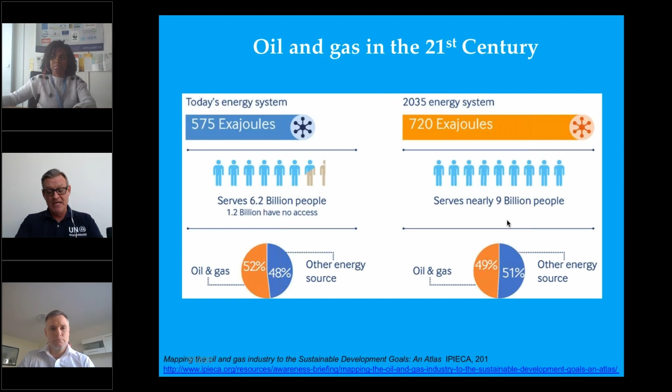Throughout the life expectancy of the oil and gas sector, chemicals are used, let's say, from cradle to grave. We're focusing on the exploration and production side of things, and within this particular module, chemicals are used throughout, whether it's at the time of exploration drilling, logging and testing, well completion, field management, workover and stimulation. Bottom line is, whatever link in the chain of the oil and gas sector, hand in glove with that is the use of a very large and complex number of chemicals.

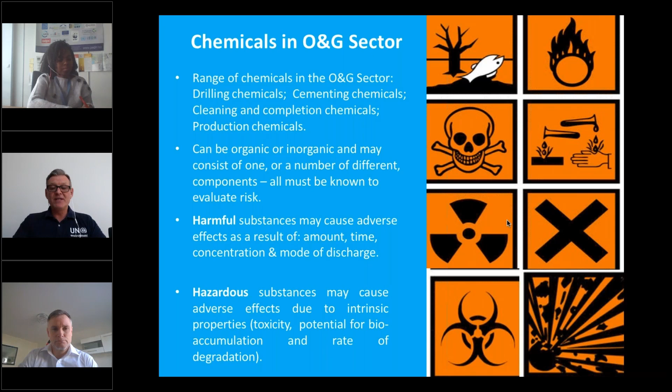Moving on, one of the biggest aspects in oil and gas as it pertains to both chemicals and waste management is the drilling fluids which are used. Drilling fluids are a major component of the sector and present major environmental and public health concerns.

When we talk about drilling fluids, there are primarily two categories: the more simple water-based drilling fluids, acronym WBDF, and the more complicated, potentially more hazardous oil-based drilling fluids, OBDF. As the name suggests, water-based, the base material is water; oil-based, the base material is oil. You could think of the differences similar to a water-based or an oil-based paint - very much the same phenomenon applies to these drilling fluids.

In more recent times, there's been a third category of drilling fluid developed and put into the marketplace: synthetic-based drilling fluids, where the oil has been largely replaced by more modern synthetic chemicals.

Water-based drilling fluids are by far the simplest, and by far the most environmentally benign, and also the cheapest. So given the choice, oil engineers would, as a first port of call, use water-based drilling fluids simply because they're cheaper. However, they have limitations - they're not good for use in deep, complex drills, drill sites which are horizontal, or where we have particularly complicated geology. That's where oil-based drilling fluids, or more latterly synthetic drilling fluids, come into play.

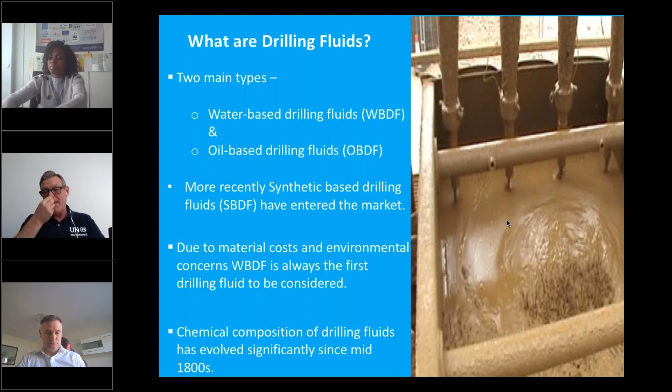Drilling fluids have been around as long as the oil and gas sector. We go back to the mid-1800s, and the chemistry of drilling fluids has evolved quite significantly. At the start of the enterprise, drilling fluids were largely water and clay, but more latterly there's been a greater infusion of chemicals and hydrocarbons, and more recently synthetic chemicals. So it's an evolution, and that process of development continues today.

Each of those chemicals comes with their own environmental and public health risks, and we as environmental practitioners need to be familiar with the components and familiar with how best to manage them. Bottom line is, drilling chemicals - drilling fluids are a cocktail of different chemicals.

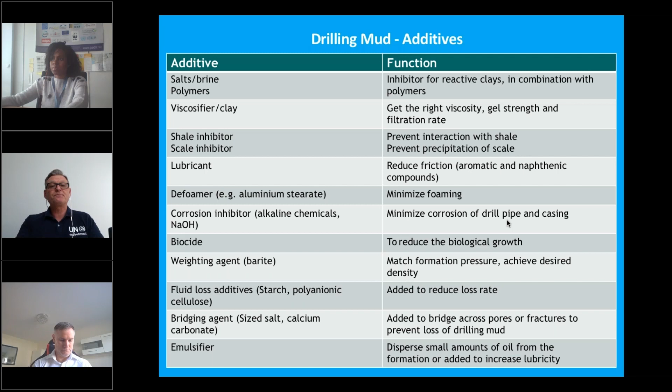As I mentioned before, water-based drilling fluids are comparatively benign. If used offshore, they would typically have little effect if discharged into the marine environment, depending on the depth and location in relation to the shoreline. But it's not uncommon for water-based drilling fluids to be discharged into the marine environment.

That said, we don't encourage the discharge of water-based drilling fluids in a terrestrial, shore-based environment, because they can have elevated pH and elevated salinity, which are not necessarily an issue within the marine environment, but within the terrestrial environment they probably are going to need to be contained and treated before disposal.

Dealing with the more complicated, deeper wells, more complex geologies where we're using oil-based muds, these muds are a cocktail of chemicals, many of which are toxic or hazardous. They are not allowed to be discharged within the marine environment, nor the terrestrial environment. They need to be contained, managed, treated, and finally disposed of. Due to economics, all drilling fluids will be reused and recycled to the extent possible, but there comes a point after which they will have to be disposed of, and that's where some of our greatest challenges are encountered.

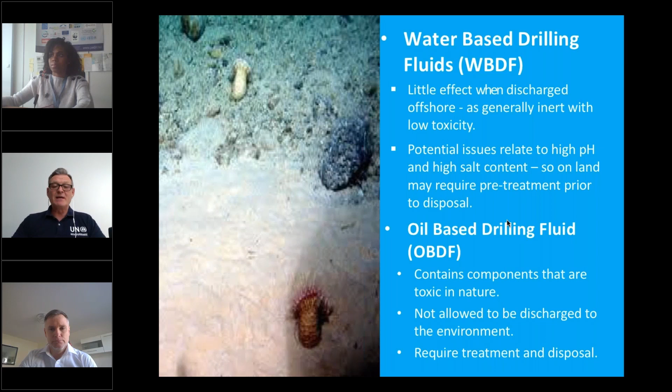We talked earlier about biocides. These are an example of a component which may contain red chemicals, a red flag. We need to be aware, we need to be concerned, and we need to monitor and manage it very carefully.

So the chemicals within the drilling sector will typically be discharged within the host environment. Many of them will be contained within the produced water. What is produced water? When we strike an oil reservoir, it would often be in conjunction with a lot of water. That water also gets liberated through the drilling process, and that's often referred to as produced water. The produced water may contain a lot of chemicals, may contain a lot of hydrocarbons. They need to be managed.

In more sophisticated operations, the produced water can and should be reintroduced back into the underlying geology. Often isn't done because it's a complicated process. Therein we end up with a disposal, a chemical problem. Again, produced water is a large chemical holding body, a large waste management consideration that we will have to encounter.

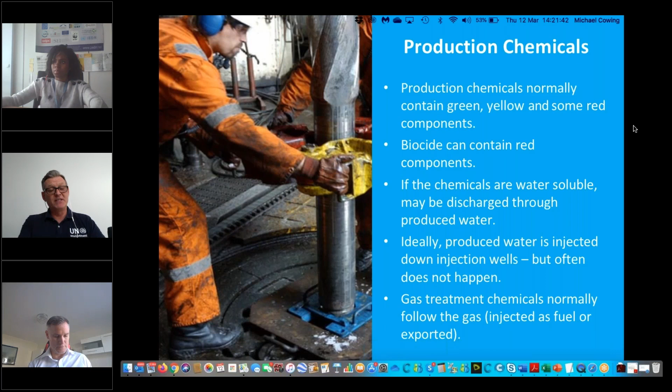Moving on, talking about the classification of chemicals, the classification of hazardous substances, we again have an articulation of this color coding: green non-hazardous, yellow or orange hazardous, red very hazardous. This color coding is done in conjunction with international conventions, international agreements, such as the United Nations Global Harmonization System, the acronym being GHS.

You may have heard of it, don't worry if you haven't, in time you'll become familiar with it. Basically, as the name suggests, it's trying to harmonize internationally the language we use, the names we use, the packaging we use when handling chemicals, to try and reduce miscommunication. Miscommunication will often lead to accidents and incidents. So we're trying to simplify and harmonize the language we use around managing, transporting and using chemicals.

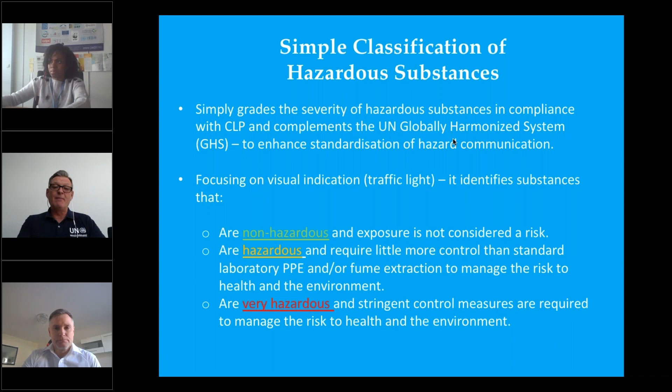I move on now to the Material Safety Data Sheet, the acronym for which is MSDS. Every chemical used, transported and ultimately disposed of must be accompanied by the MSDS. I would say as an environmental practitioner, this is possibly the most important tool in your toolbox for managing chemicals. The MSDS is in compliance with international conventions. It's not optional, it's a must. The manufacturer must send chemicals with the MSDS.

The user, in this case the oil companies, the subcontractors, must have the MSDS to hand. It must be available, it must be displayed, so that individuals working with the chemicals are familiar with the risks they're being exposed to, familiar with things such as health and safety requirements, and familiar with what personal protective equipment needs to be used. The MSDS will also, in detail, tell us how ultimately these chemicals need to be disposed of. So as I mentioned, the material safety data sheet is a key thing in the management and regulation of chemicals broadly, but also specifically within the oil and gas sector.

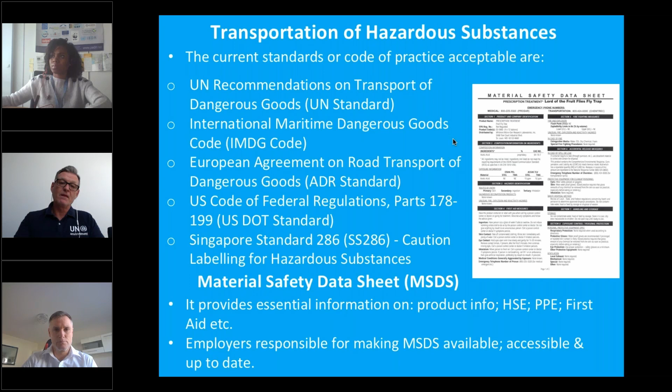To manage the risks, we need to understand the composition of all these chemicals. We can't know one component and not the other. We have to understand in entirety what the components are and what the risks are. If uncontrolled, chemicals can pose serious risk to both public health and the environment.

To help you manage chemicals, there are multiple interlocking, interrelated national and international legislative tools, be them national laws, international treaties, international agreements. There's a host of them in place. We need to be familiar with them and how to apply them. Most importantly is the MSDS, the Materials Safety Data Sheet, which must be drawn up in compliance with all these international laws and treaties. The MSDS is your best friend, your best tool for managing chemicals in the oil and gas sector.

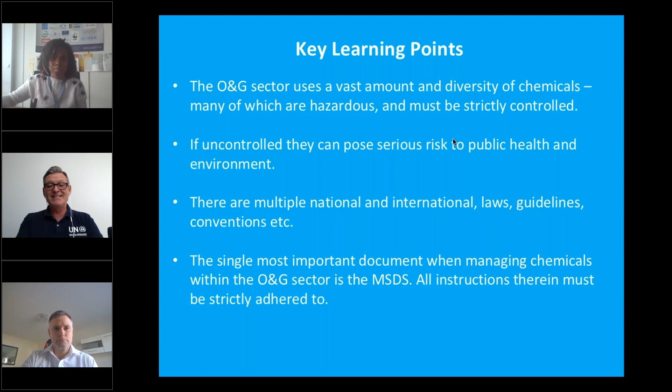Thank you for that. Again, very rushed, very simplistically, but hopefully this gives you an overview of some key points as they relate to the oil and gas sector.

The second part of the presentation relates specifically to waste management within the sector, and there's a lot of overlap between use and management of chemicals and management of waste, because many of the chemicals used ultimately end up as a waste product.

What will we talk about in this section? We'll talk about what is waste, why waste is a concern to us. We'll look at some definitions of waste, which is very important in a legal context - when is something a waste, when is it not. We'll look at some international frameworks, in particular the European Waste Framework Directive, a very important piece of legislation in a European context. What are some of the specific wastes in the oil and gas sector? Waste management planning, which is a key component, and we'll remind ourselves at the end of some key learning points.

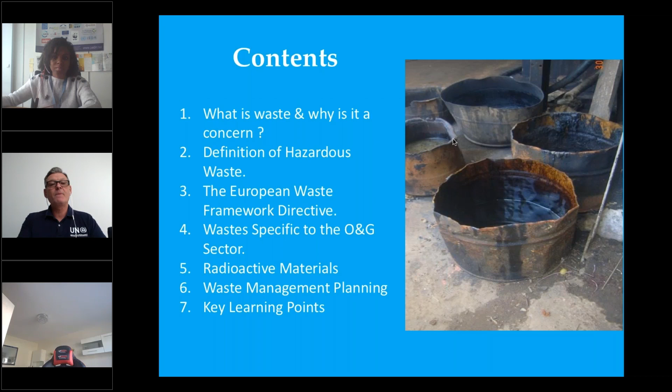So, what is a waste? In the legal sense, a material becomes a waste when it is a substance or object which the holder discards, or intends to discard, or is required to discard legally. So it's gone beyond the point of its utility value - it's to be or has been discarded.

When we talk about hazardous waste, that falls under the same definition, but there's a sub-definition: hazardous wastes are those which pose substantial or serious threat to public health or the environment, hence the name hazardous. They can be hazardous because of their characteristics, which could be ignitability, reactivity, toxicity, or corrosivity - one or more of these makes the waste product hazardous. Again, they can be in various forms - gaseous, liquid, or solid.

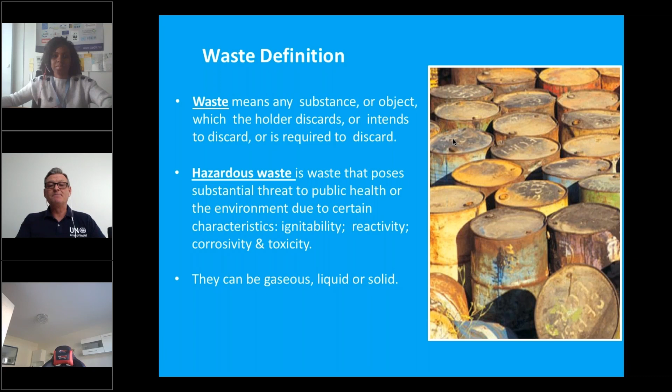Sorry, Mike, to cut you short - we have like 10 minutes for you to do your presentation. Okay, jolly good, I've just been informed I have 10 minutes left, which is perfectly fine. I think we're on course.

The drilling fluids, we've talked about a little bit - it could be oil-based, chemical-based, or synthetic, but it's the drilling fluid being pumped down the well, which will be reused to the extent possible, but ultimately becomes a major waste management problem for us. We then have produced water, which we talked about previously.

Oil and gas being liberated, but often in association with substantial volumes of water. Produced water by volume alone is arguably our biggest problem. It can be re-injected, often isn't, which leads to very significant problems. We then have secondary waste problems such as drainage water, domestic waste, sewage, cooling water, solid waste, and accidental spills—all of this material becomes a waste which needs to be managed.

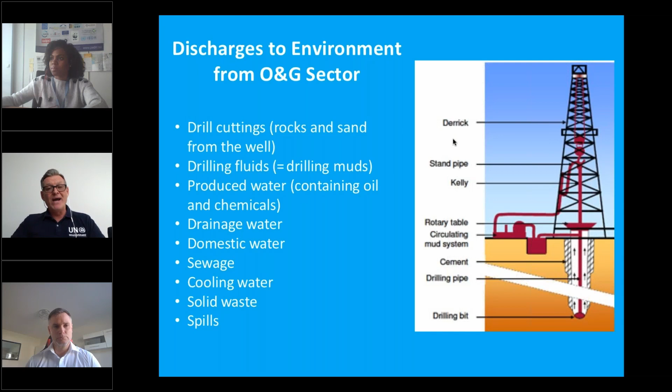In terms of the treatment of hazardous waste, it needs to be managed cradle to grave—every link of its life cycle has to be managed with no inadvertent discharge to the environment. We have to recognize that the oil and gas sector is a very substantial waste generator globally.

In a lot of countries, international oil companies are working in developing countries. If we talk about Africa, Asia, to an extent the Caribbean, a lot of these developing countries lack substantial or sufficient waste management infrastructure. They may not have engineered landfill sites, incinerators, or thermal desorption units. So if oil companies are producing waste in an environment where the host country doesn't have the waste facilities, those facilities have to be developed and engineered, long-term or imported on a mobile basis. Incinerators and thermal desorption units can be imported, or the waste itself has to be managed, packaged, and exported to a disposal facility.

Irrespective of whether the oil company is American or European, operating say in Africa, the oil company should not lower its standards to those that pertain in that particular African country. The important thing is they should adhere to the same standards they use in Europe and North America. In my experience, very often they will try not to, but as regulators and environmental scientists, we have to ensure oil companies operate to the highest standard.

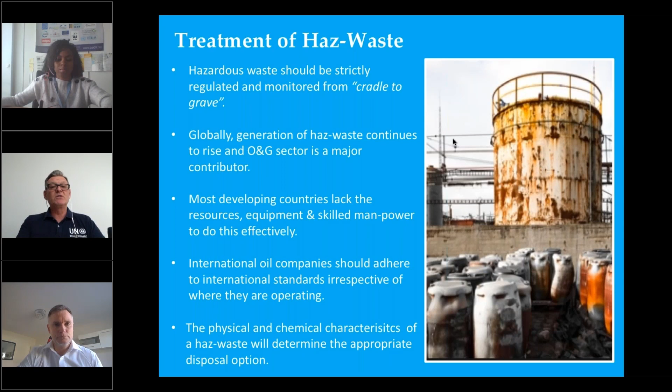The physical and chemical characteristics of the hazardous waste will determine which disposal option we use. In Europe, a very important piece of legislation is the European Waste Framework Directive, which sets in legislation many important components and considerations.

It enshrines the polluter pays principle, which means if you generate the waste, if you are the polluter, you have to pay. Extended producer responsibility means if you're the waste generator and you give it to a third party transporter, for example, and he dumps the waste illegally, you as the generator still retain responsibility. It's not out of sight, out of mind.

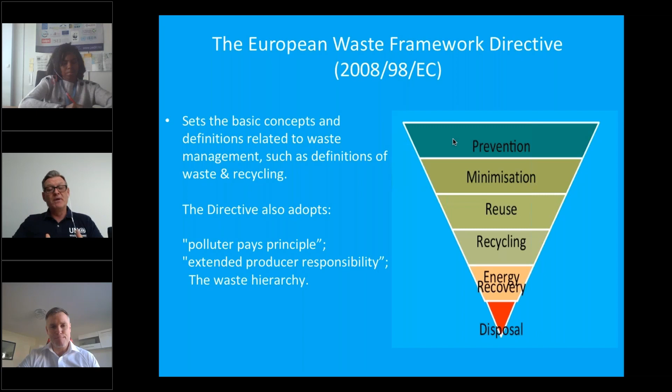It also introduces the waste hierarchy, which I think we'll all be familiar with. This enshrines the fact that at the top of the hierarchy, the most desirable is that we prevent waste, minimize waste, reuse waste, recycle waste, and only at the bottom end, only the smallest remaining fragment of waste ultimately needs to be disposed of.

In terms of the management of hazardous waste, when you have hazardous waste, you have to act appropriately. The hazardous waste cannot be mixed with inert waste, it cannot be diluted. It has to be properly contained and labeled, must go to a licensed hazardous waste disposal facility, and the environmental regulator, whichever country, has to be notified of that movement of hazardous waste.

Some rogue operators might want to dilute the hazardous waste, or mix it to get it to a chemical characteristic where it's no longer classed as hazardous. Such approaches are prohibited in law and should be monitored and regulated by ourselves, not condoned, and corrective action needs to be taken.

The picture on this slide is taken in an African country—cradle to grave, I followed the process. The hazardous waste, which was meant to be going to an engineered landfill, ended up, as shown here, dumped on some agricultural land. Very sad, very common. That's where strict regulation and enforcement is essential.

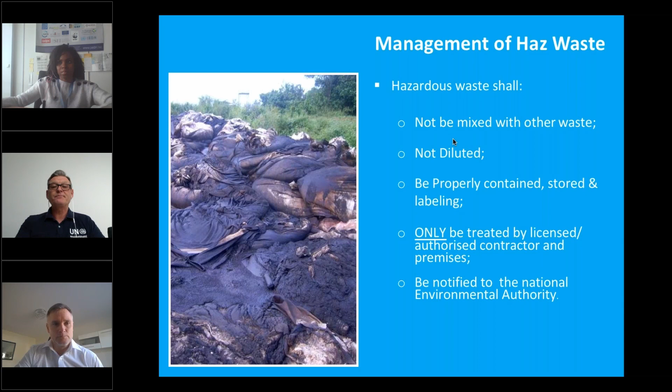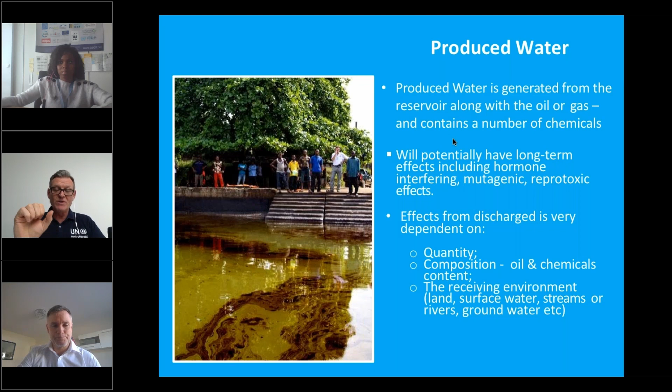We've talked about the impacts of water-based and oil-based drilling fluids, I don't need to labor that again. Produced water, if discharged inappropriately, as shown in this picture, is going to be liberating chemicals and hydrocarbons. Produced water, we have to get on top of it—I'll explain how we can do that. And we have very many emissions to air, one of the biggest culprits of that being flaring and venting.

We're saying in this day and age, flaring and venting needs to be a thing of the past. It needs not to be encouraged other than under perhaps emergency situations. How do we manage all of these different solid, liquid, and gaseous wastes?

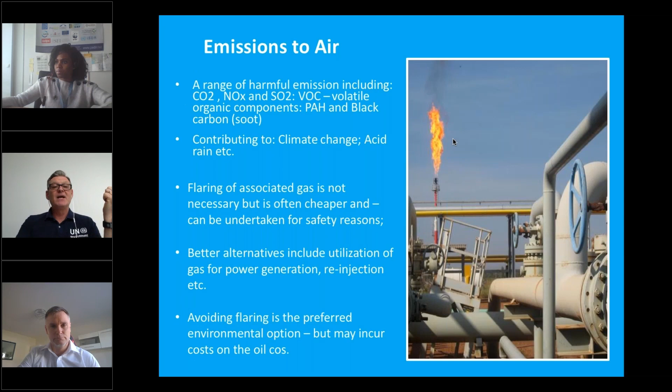This should be encompassed in the waste management plan. When applying for a license, when the EIA is being done, the oil operator has to produce a waste management plan. With chemicals, we've got the material safety data sheet. With waste, we've got the waste management plan. It is the Bible, it is crucial. The operator must anticipate how much waste is going to be produced, of what characteristic, where and when.

Some of the graphs to the right would show you that I've extracted from a waste management plan. They're anticipating what they're going to generate, when they're going to generate it, and in what volumes.

So the plan must identify the waste. The plan must also identify how it is going to be disposed of. If there are existing facilities to be used, all well and good. If there's not, what are they going to do? Are they going to build a landfill site, for example? Are they going to import thermal desorption? Are they going to import incineration? Are they going to stockpile, package, export overseas?

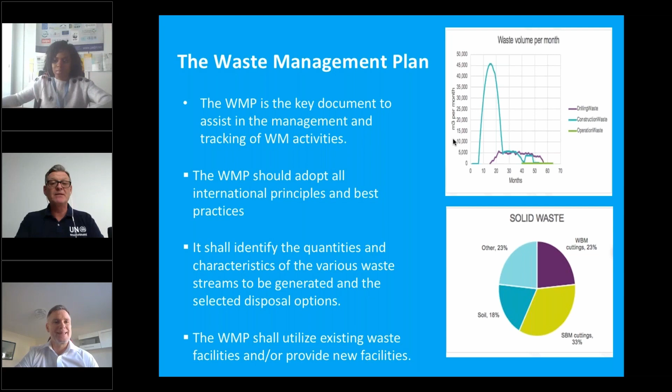When you're evaluating the waste management performance of a company, the waste management plan is your Bible. That's your go-to document. There are many options for waste management. I've mentioned some of them in passing. Ian's going to get into detail on them.

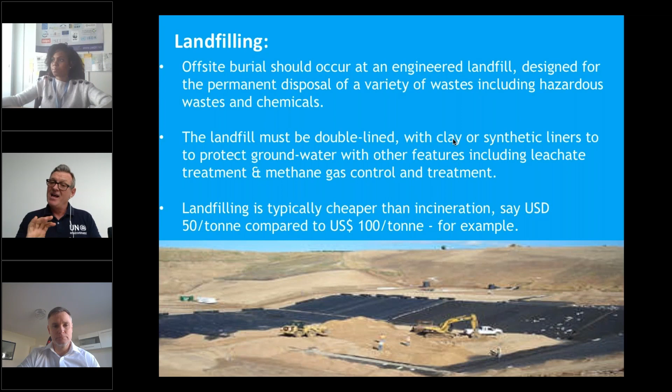We have landfilling, which is an engineered site with low permeability membranes. It's really a containment solution, relatively middle order cost, perhaps $50 per ton.

Thermal technologies are more expensive, perhaps double the cost, but there is a role for thermal technology. Some waste products, some hydrocarbon products won't lend themselves to bioremediation, won't lend themselves to landfilling. They'll need to be disposed of thermally, either by incineration or thermal desorption. Ian will talk more about these in the coming presentation.

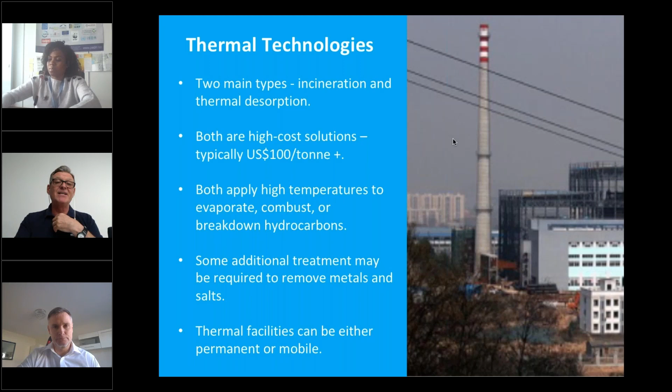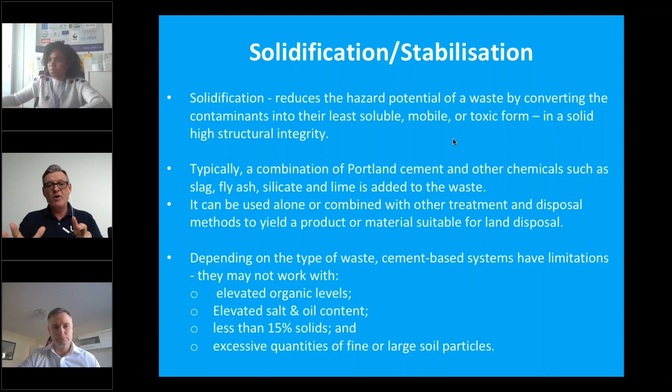There's solidification, where you try and stabilize the product, typically using cement, fly ash silicate. It does have an application, but doesn't work in all situations. If you have less than 15% solids, if you have very elevated organic levels, it's probably not going to be the technology for use. An example here of contaminants, hydrocarbons, being cemented in place to reduce their migration, to reduce their leaching.

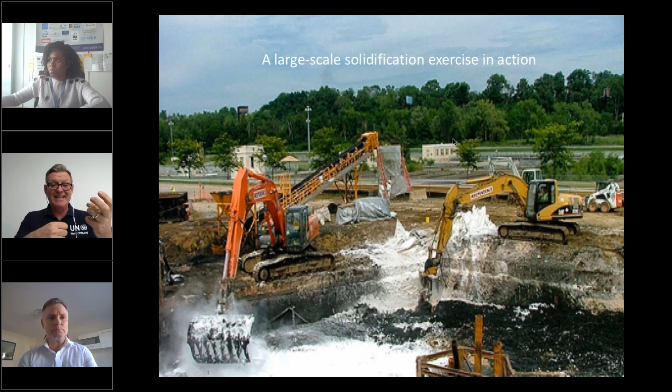So basically, there's a range of waste products, there's a range of solutions, all of which need to be evaluated, identified, and selected in the waste management plan.

Very quickly then, just to summarize with my final slide, some of the key learning points. We have to recognize the oil and gas sector is a major waste generator. Waste management is hand in glove with oil production, gas production. Much of this waste is hazardous and will need strict control, regulation, and enforcement. Some of the biggest waste products you're going to deal with will be the cuttings, the waste mud, and the produced water. Very large in volume.

It needs strategic planning in advance, not at the time of when it's being produced. Oil companies must comply with best practice, best international practice. They cannot lower their standards simply because they're working in a developing country. I think my final point is just to re-stress the fact the waste management plan is the Bible, it is the key, and it will enable you to keep the oil companies on track, honest, and performing in compliance with best practice.

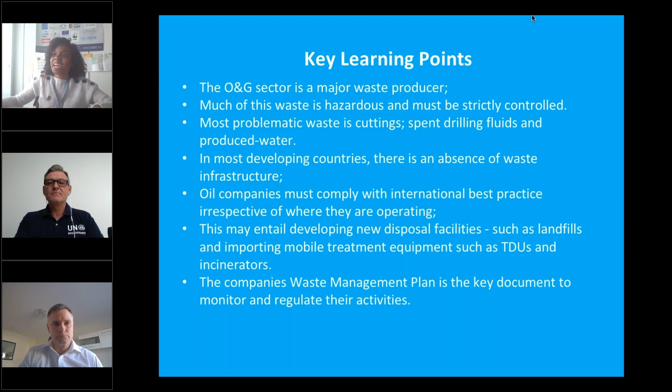He's going to be focusing on one of the projects he's done in Iraq. Thank you, Chi, and welcome everybody. I'd like to present a couple of case studies on remediation and waste management in the oil fields from the experience that RSK have had in Iraq over the last 7 years.

We've been working in the Basra Governorate for about 6 years now in a number of the oil fields, including Rumaila, Zubair, and Majnoon, as well as West Qurna. The two case studies that I'd like to cover today relate to the work that we've done in Rumaila. You can see that on the maps on this slide, and also further east in Zubair oil field.

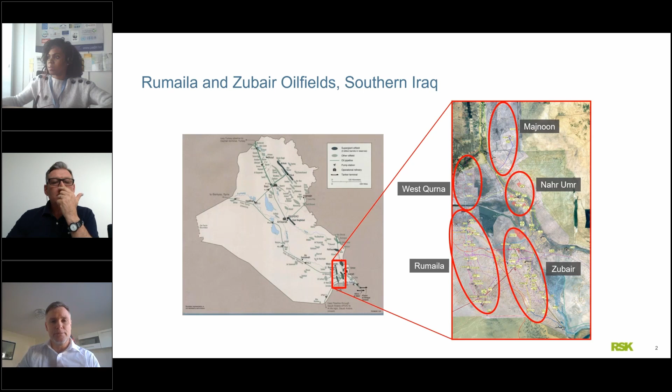Mike's touched upon this in his overview presentation. What I'd like to talk about today relates to particular primary sources of contamination that we find in the oil fields, including gas vent pits, degassing stations, leaking oil pipelines, and, as Mike mentioned, produced water pits, which come in various shapes and sizes but, certainly in southern Iraq, can be very extensive, covering several kilometers laterally, with a mixture of oil and water ponding in an uncontrolled fashion across the oil fields.

It's very important to assess the environmental setting of a particular contaminated feature or leak site in order to understand what the potential environmental risks might be, identifying the key receptors to the contamination in order to assess what the potential linkages might be between the sources and the receptors.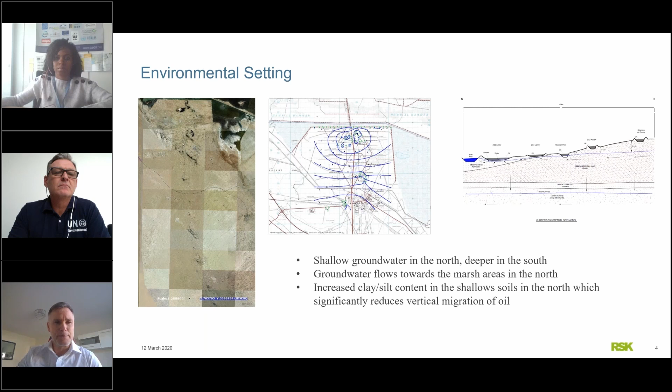On this slide you can see the point I'm trying to highlight, which is the different penetration of the oil in the north and south of Rumaila field, due to the difference in the clay and silt content of the soil.

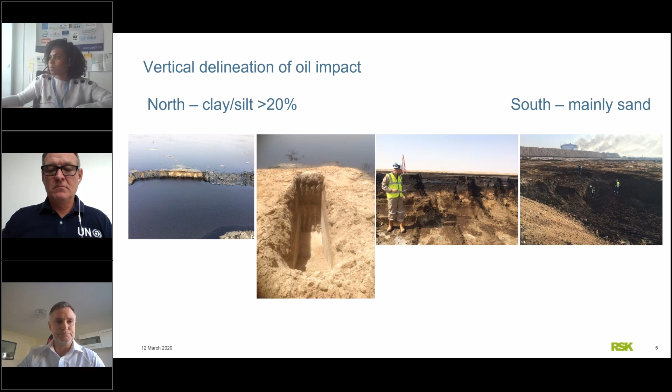It's also very important to have an understanding of the composition of oily wastes in an oil field environment, and to recognize the difference between a fresh oil spill and one that has undergone a degree of weathering.

By comparison, when we look at an oily sludge that is heavily weathered, perhaps having weathered in the desert for a number of years through natural processes of degradation and volatilization, we see a significant reduction in the relative proportion of C5 to C35 hydrocarbons and a relative increase in the heavier, more complex hydrocarbons that don't typically degrade well naturally. The percentage of C5 to C35 can be as low as 15% in a weathered sludge.

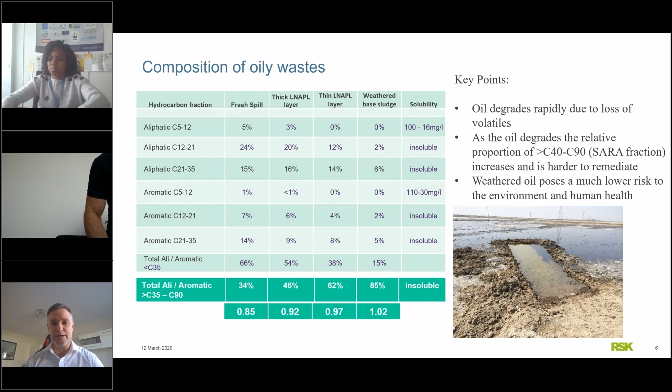When we're looking at the design of a remedial system and an assessment of the risk, it's very important to try and ensure that any remedial targets that we develop and negotiate with the regulators are risk-based and take into account the associated source pathway and receptor linkages that we've identified in our initial assessment.

As I mentioned before, the receptors very often in an oil field environment are groundwater and surface water receptors, but we also need to consider oil field workers and any neighbouring communities that may potentially be at risk from the contamination sources.

In determining risk-based remedial targets, we also need to ideally develop individual targets for the separate TPH fractions rather than generating a total TPH remedial target, because the risks associated with the different TPH fractions vary significantly.

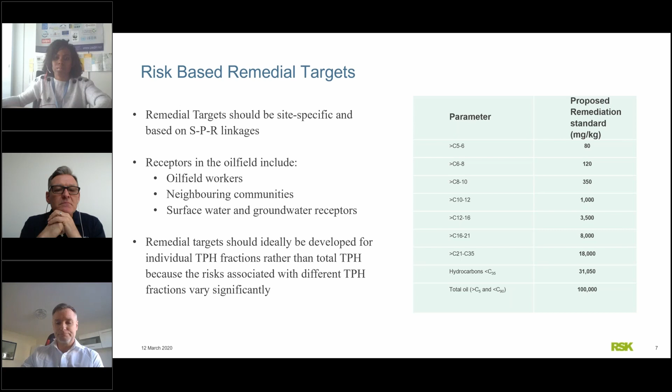So how do we remediate these produced water pits, these vast expanses of oil and water lagoons in the desert? It's very much an engineering approach, using earthworks and heavy plant to isolate the lagoons into separate areas by creating earth bunds in order to create more manageable areas where we can then pump out any oil and water if possible, or bail out the water into a sump or a containment pit.

That's the first phase, which then allows access for us to undertake any UXO clearance that might be needed. UXO clearance isn't necessary everywhere, but it's sadly a very real risk in Iraq, and a very important part of the project before we can actually start excavating and dealing with the sludges and the underlying soils in a remediation setting.

Once we've undertaken the UXO clearance, we then remove the sludge from these isolated phases of the lagoons, and we tend to do that using mechanical plant, creating a levee, essentially pushing the sludge to one part of one side or one corner of the lagoon.

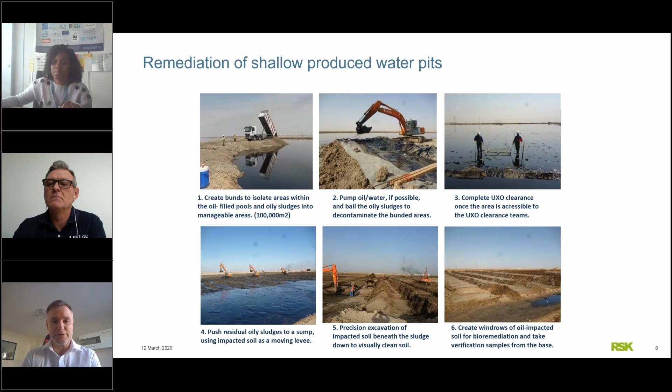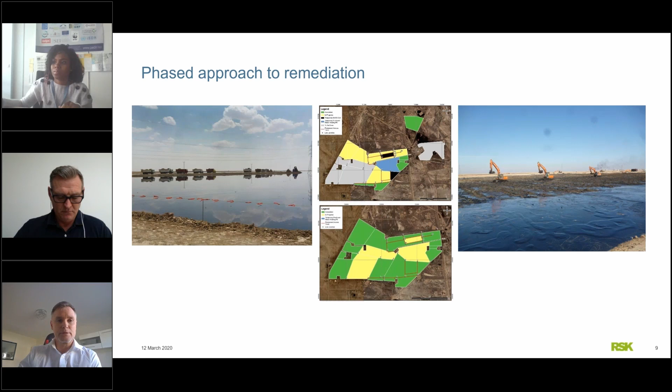We also come across occasionally much deeper features, oil pools. This particular one in Rumaila field was a very famous oil pool known as the Russian pool, essentially a former borrow pit that over the years was used as a repository for oily water and waste oil, building up to huge volumes over time. Actually potentially a bit easier to deal with than the vast expanses of produced water lagoons.

The first stage in this particular example was to pump off any floating oil, and in fact the oil was recycled and recirculated directly into the export pipeline, and we managed to recover over 200,000 cubic meters of floating oil from this particular feature. We then pumped out over 600,000 cubic meters of water, which was put through a water treatment system and then discharged back to ground via a soakaway.

The underlying sludges were then excavated and segregated for storage, and the contaminated soils were removed in layers for ex situ bioremediation. Overall, a significant quantity has been stockpiled in lined cells for future treatment phases.

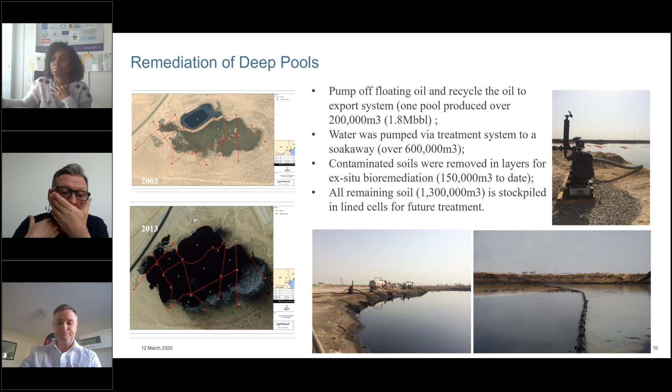So how do we treat the sludges? We've actually looked at two potential options for treating the very heavily contaminated oily sludges. The sludges are quite problematic and can be quite expensive to treat via thermal and other methods. The two options we've looked at both involve the recovery of the oil from the sludge. Given the huge quantities involved and the high levels of oil content, recovering the oil is very important, especially if it's possible to find a reuse for the oil, because the oil essentially has a value, and this can be used to offset the price of the remediation works.

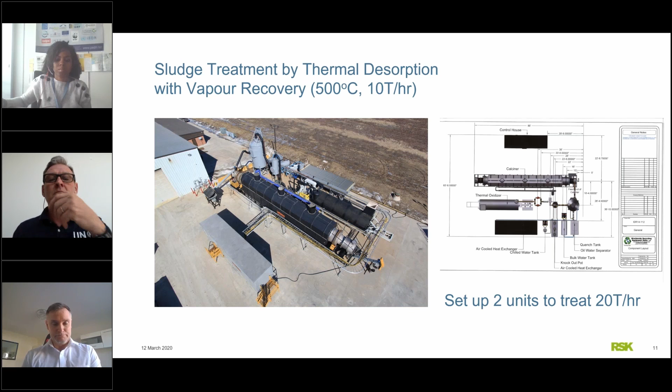So the first method I'd like to talk about, Mike mentioned it earlier, is thermal desorption with vapor recovery. It's an indirect fired thermal desorption unit with a built-in vapor recovery unit, which distills and recovers the oil from the sludge. In this particular example, the sludge has a solid content of between 35 and 60%, and generally a very low water content. The oil typically comprises mainly long chain hydrocarbons, 85% of which have a carbon chain length above C35.

In the various pilot tests that we've done, they've concluded that generally the best recovery yield is about 20%, typically at around 400 degrees C. And we can recover about 10% hydrocarbon compared to the initial volume of sludge.

For example, in this case, we had just over 350,000 cubic meters of sludge, and we estimate that we can remove just over 35,000 cubic meters of recoverable product with a value of about $50 per barrel. This equates to a huge amount, $11 million.

When you look at the setup and operational costs on this project over a 2.5-year cycle, the overall total treatment cost is $32 million, which equates to $88 a cubic meter. However, if we can incorporate the $11 million of revenue from the recovered oil, this reduces the treatment cost down to $57 per cubic meter.

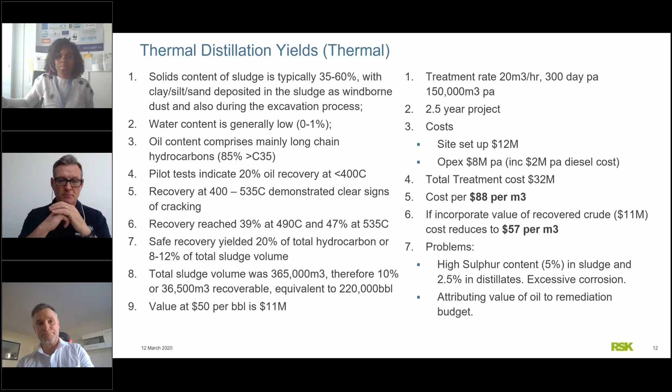No problem. The second option is enhanced separation by using a tricanter centrifuge in a heated system using steam, and the use of a diluent, which is typically a lighter hydrocarbon, for example fresh crude oil, diesel, or even gas condensate. In this particular setup, the total cost of treatment over a similar 2.5-year cycle is $17.5 million, which gives us a lower treatment cost of about $48 per cubic meter.

And if we can incorporate the value of the recovered crude, then this reduces the cost right down to $18 a cubic meter. However, these calculations assume that we're using fresh crude as a diluent, which would be provided by the oil operating company, as opposed to using diesel, for example, where there will be a cost for that.

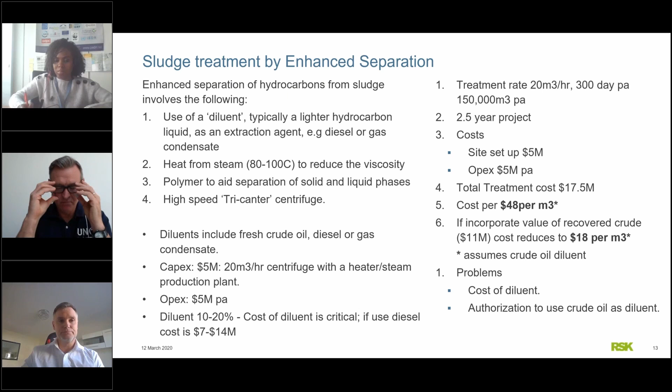Finally, I'd like to talk about how we treat the contaminated soils. So we've removed the sludges, we're looking at options for sludge treatment, which we've just talked about. Once you get below about 10% total hydrocarbon content in the soil, there are much cheaper, more cost-effective options for dealing with the contaminated soil, and we've been doing a lot of work on ex situ bioremediation to treat soils in this category. Bioremediation applies biological processes to clean up the contaminated soil and water.

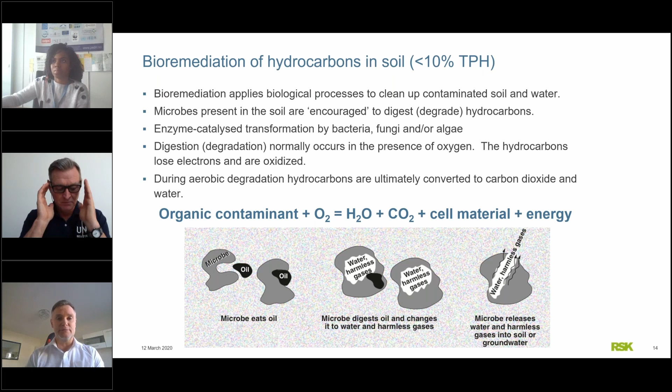It's an enzyme catalyzed transformation. It uses bacteria and fungi and algae, or a combination. And essentially the hydrocarbons are degraded aerobically and ultimately converted into carbon dioxide and water.

Here we can see one of our treatment sites in southern Iraq. You can see that we've laid the contaminated soil out in long linear piles known as windrows, and we manage the windrows using a specialist piece of plant, which you can see in the photograph on the right there, which is called a windrow turner.

This essentially manages the windrows and turns the soil, homogenizes the soil, and aerates the soil, which is important in the management of the bioremediation process.

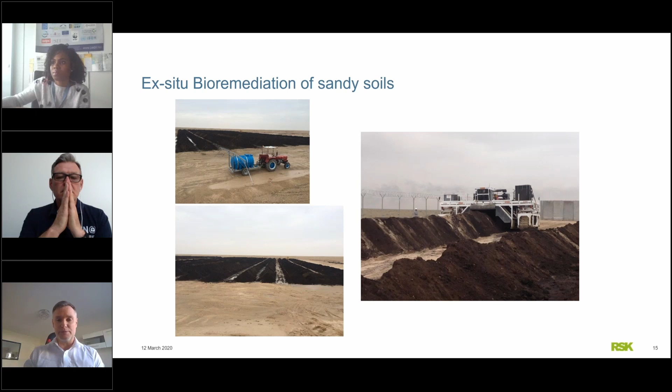Here's a picture of the typical layout of one of our sites with the windrows, which are all labeled and identified. So when we monitor them and we're monitoring the progress of the remediation, everything has its own unique identification, so that when we're reporting this, we know exactly where everything is and where the samples have come from.

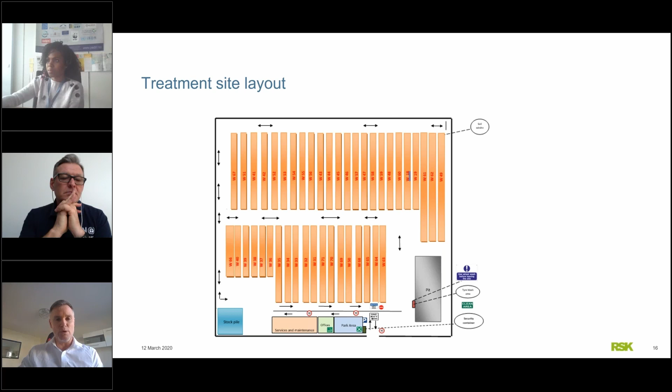The most important thing to do in ex situ bioremediation, essentially what we're trying to do is nurture the microbes, create the best environment for them in the optimum conditions to encourage them to naturally degrade and metabolize the hydrocarbons. It's important that we monitor regularly on a daily basis temperature, pH, moisture content, oxygen. And also we need to add nutrients, most importantly nitrogen and phosphorus, which generally we do by adding normal agricultural fertilizer, or there are other sources of nutrients that we can use, including cattle manure.

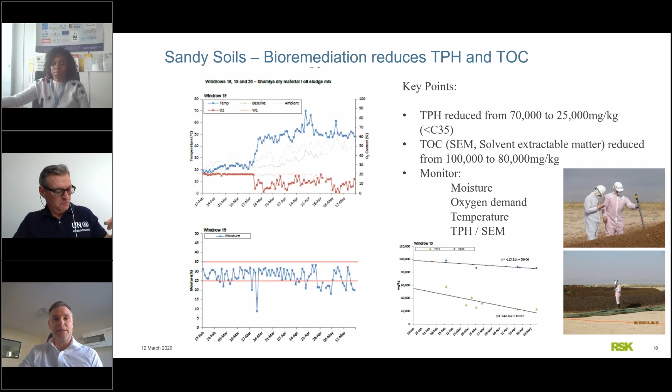Bioremediation has been proven to be very successful in sandy soils, where we can reduce the TPH concentrations from between 70 and 100,000 milligrams per kilogram right down to 10, 15, 20,000 milligrams per kilogram, depending on what the remedial target is. It becomes more difficult in clay-rich soils, mainly because it's more difficult to homogenize the clay-rich soils, and it's more difficult to aerate them to provide the required amount of oxygen for the microbes to degrade the hydrocarbons.

And actually, in some cases with clay-rich soils, we find that the TPH levels in the soil actually appear to increase at the start, and this is due to homogenization of the hydrocarbons as the soils become better mixed by the windrow turner. We can add bulking agents and organic matter into the windrows in order to provide better aeration of the soil, and to do this we often add wood chippings or straw or sawdust, which is quite effective.

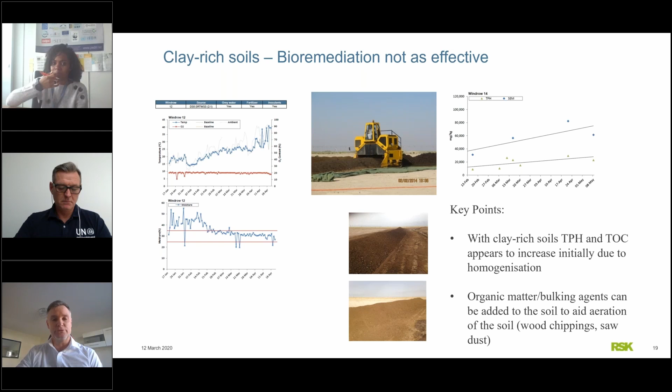So the lessons learned in bioremediation: it's very cost-effective and can be very successful for remediation of sandy soils impacted with weathered crude oil. We can even blend more heavily impacted sludges in a relatively small ratio into the sandy soil to enable treatment of sludge that would otherwise be impossible to treat via bioremediation.

Urea and general agricultural fertilizer normally provide all the required nutrients. We can use grey water to help speed up the remediation process, but this isn't essential, and more often than not, ordinary RO-treated groundwater works very well.

The risk-based remediation goals for the TPH fractions within the C5 to C40 range are generally achieved within about 3 to 4 months via ex situ bioremediation in our experience. The longer chain hydrocarbons above C40 are present but generally not degraded very well. This can cause some visual impact even in treated soils, but typically they have low toxicity and low solubility, so it's more of an aesthetics issue than a risk. Planting can normally overcome any concerns over visual appearance if this is considered an issue.

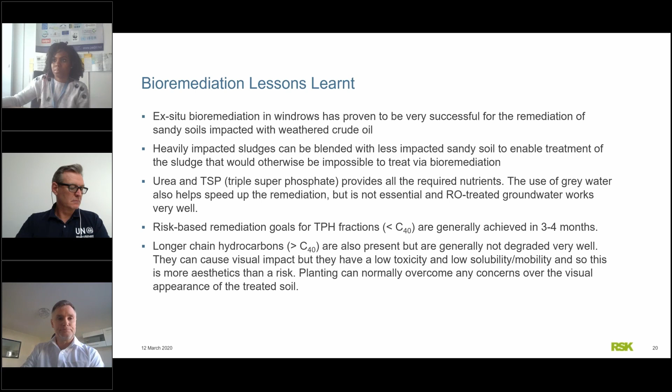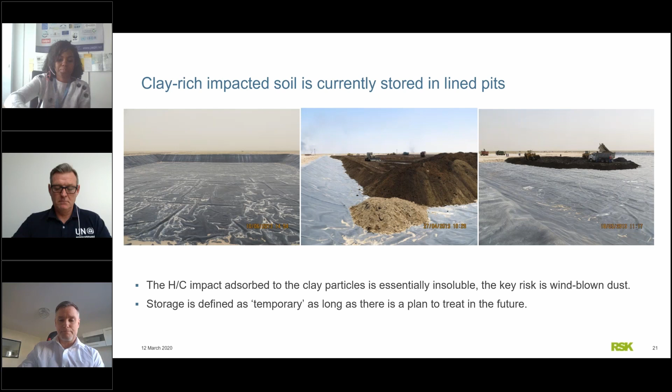So to conclude: remediation and waste management costs can often be offset by the value of the recovered oil, especially if the oils are contained quickly to reduce volatile losses from the oil. Early intervention really captures the most value from the recovered materials.

It's very important that the field program is controlled to minimize the mixing of wastes and to preserve the quality of the oils and sludges to maximize oil recovery. Where possible, we should really try to use the recovery of the oil to offset the remediation costs.

This can actually make treatment costs much more viable to oil operating companies, even when employing thermal methods, which typically are considered quite expensive. We've also shown that ex situ bioremediation is an effective treatment technology for marginally contaminated soils where oil recovery is not cost effective.